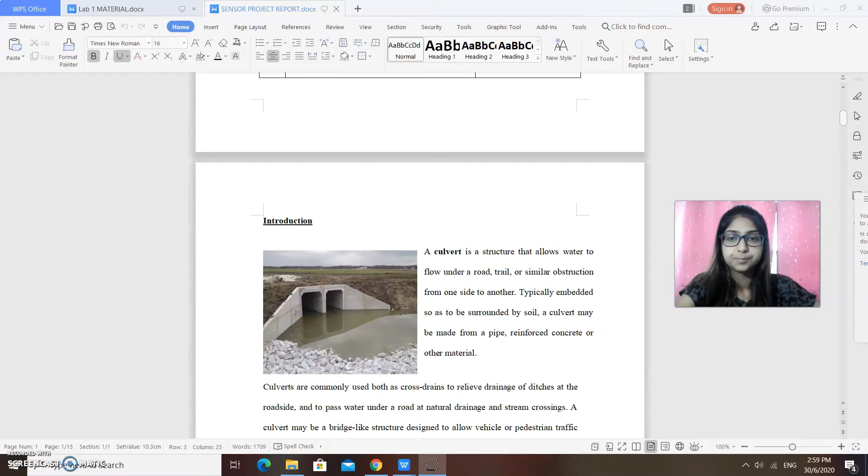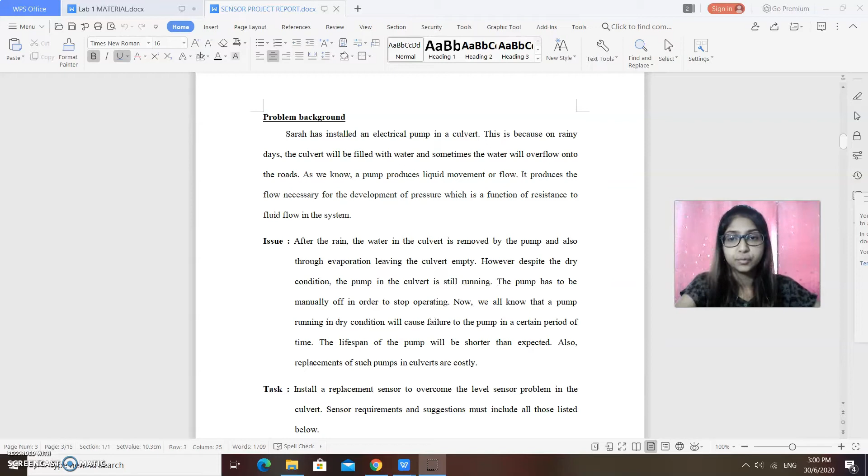The problem background. Sarah has installed an electrical pump in the culvert. This is because on rainy days the culvert will be filled with water and sometimes the water will overflow onto the roads. As we know, a pump produces liquid movement or flow. It produces the flow necessary for the development of pressure, which is a function of resistance to fluid flow in the system.

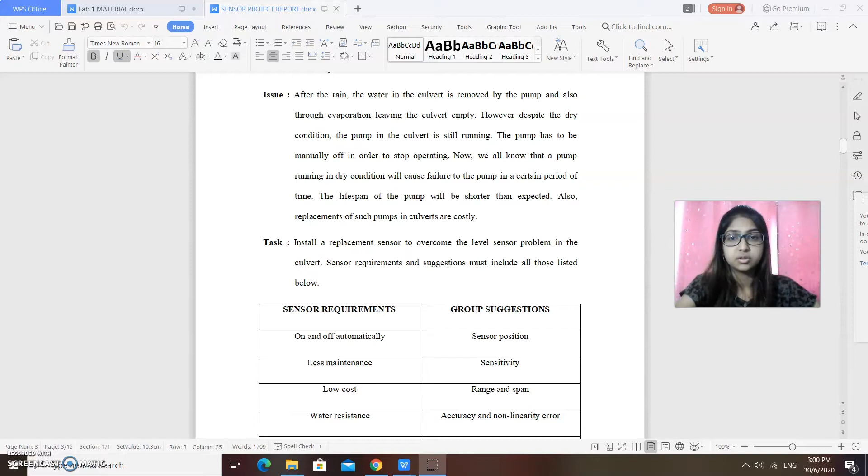The issue is, after the rain, the water in the culvert is removed by the pump, also through evaporation, leaving the culvert empty. However, despite the dry condition, the pump in the culvert is still running. The pump has to be manually turned off in order to stop operating. The lifespan of the pump will be shorter than expected. This is because a pump running in dry condition will cause failure to the pump in a certain period of time. Also, replacement of such pumps in culverts is costly.

Our task is to install a replacement sensor to overcome the level sensor problem in the culvert. Sensor requirements and suggestions include on and off automatically, less maintenance, low cost, water resistance, and suitable for outdoors. Our group suggestion includes sensor position, sensitivity, range and span, accuracy and non-linearity error, and also resolution if any.

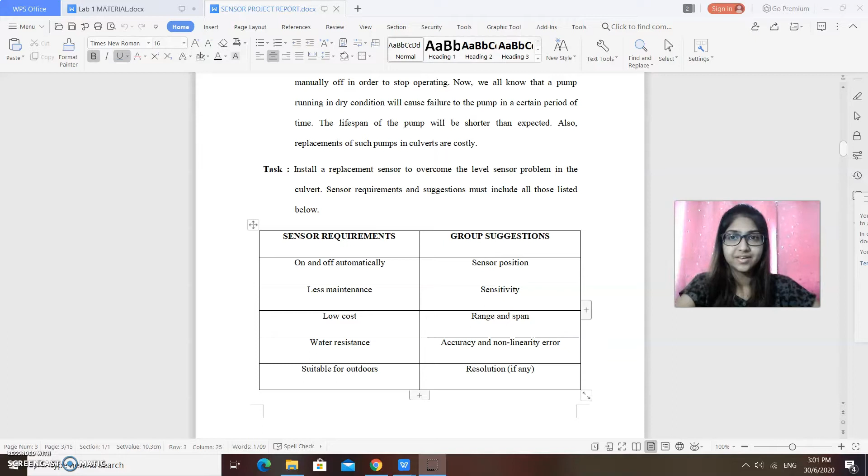I am now presenting predictive maintenance of magnetic level sensor for culvert system. Predictive maintenance is a process which alerts a maintenance technician to a problem that develops in a critical production system. This strategy offers cost savings over regular or time-based preventive maintenance, since activities will only be undertaken if necessary.

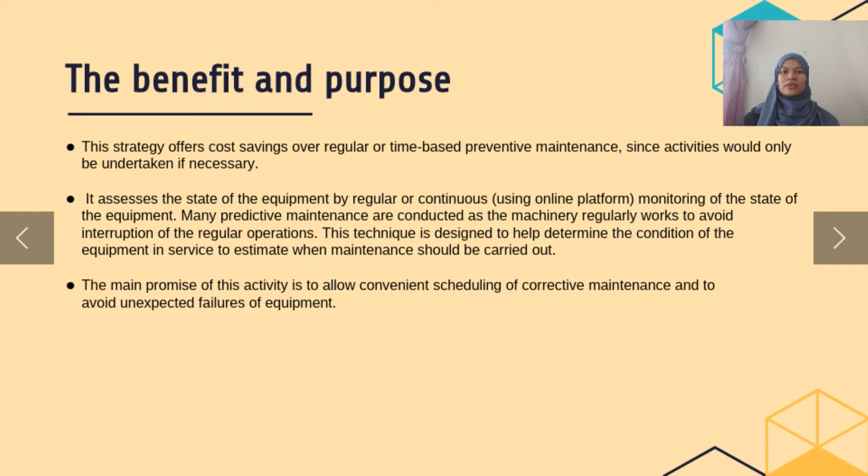It assesses the state of the equipment by regular or continuous online monitoring of the state of the equipment. Many predictive maintenance activities are conducted as the machinery regularly works to avoid interruption of the regular operations. This technique is designed to help determine the condition of the equipment in service to estimate when maintenance should be carried out. The main promise of this activity is to allow convenient scheduling of corrective maintenance and to avoid unexpected failures of the equipment.

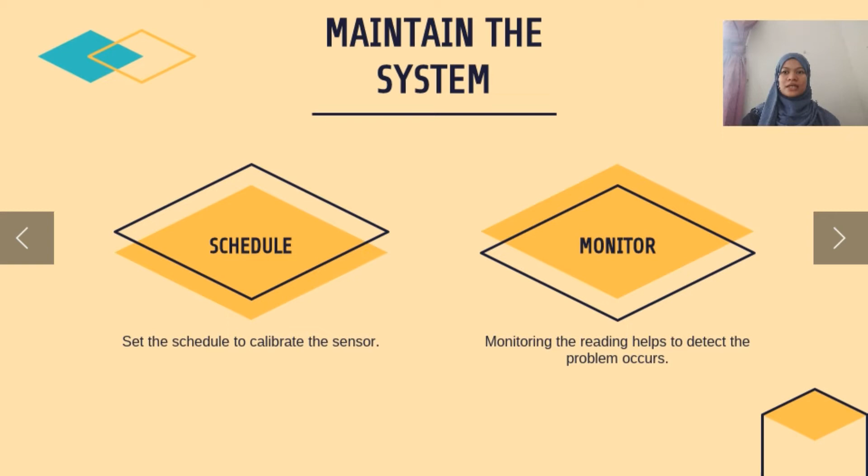In order to maintain the system, we must set the schedule to calibrate the sensor. The monitoring of the reading helps to detect problems early. Mounting and preventive maintenance are the recommended installation method for level gauge. Before installation of the level gauge, the mounting methods must be done correctly.

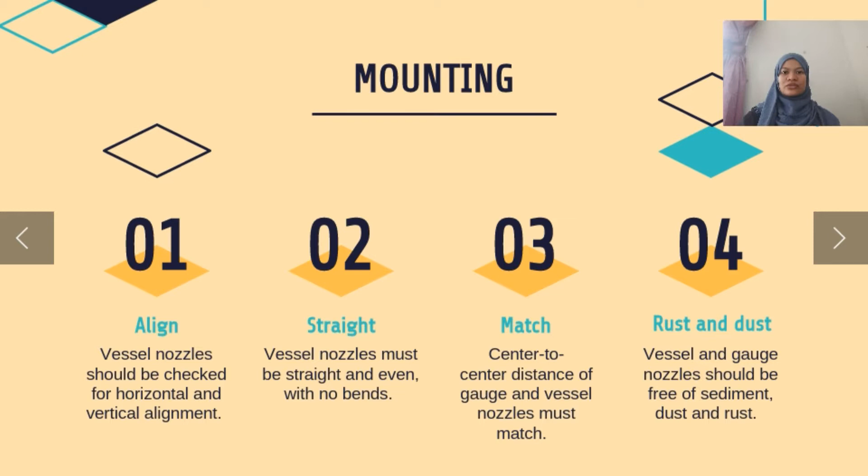Firstly, vessel nozzles should be checked for horizontal and vertical alignment. Secondly, vessel nozzles must be straight and even with no bends. Thirdly, center to center distance of gauge and vessel nozzles must match. And lastly, vessel and gauge nozzles should be free of sediment, dust, and rust. Periodic inspection will keep the level gauge operating properly for many years. This gauge provides level indication on critical services, and a systematic program of preventative maintenance will provide excellent long-term protection.

We must first keep the inside and outside of the level gauge clean. If there are any impurities in the process, or if it tends to build up on equipment, it will be necessary to flush the gauge periodically. How often or thoroughly will depend on the nature of the process liquid. It is important that the float can move freely inside the chamber. If there is an externally mounted transmitter or alarm switch, it is important that all covers and seals are in place and maintained. Moisture, dust, and debris entering these electronics housings can cause permanent damage, leading to failure.

Monthly inspection for float, terminals and connections should be done. Take the float out of the chamber once a month to test for leakage or damage. Replace and reinstall the float. Proper float is critical to level gauge operation. Lastly, check the electrical terminal connections and wiring for signs of damage due to heat or vibration.

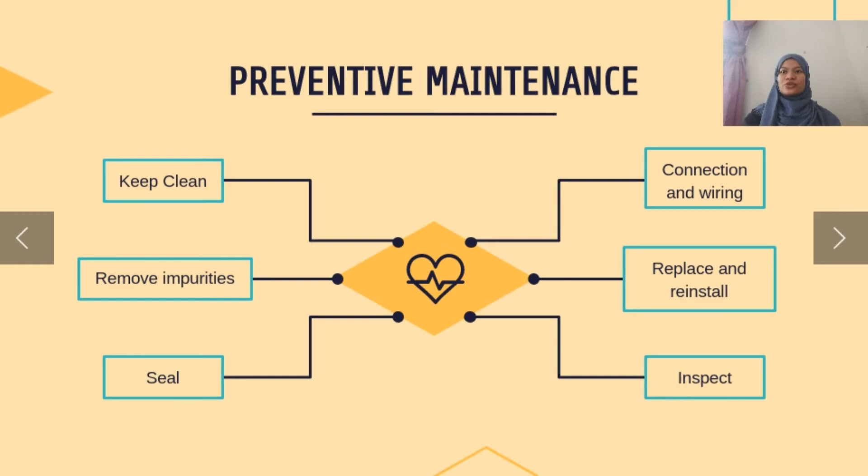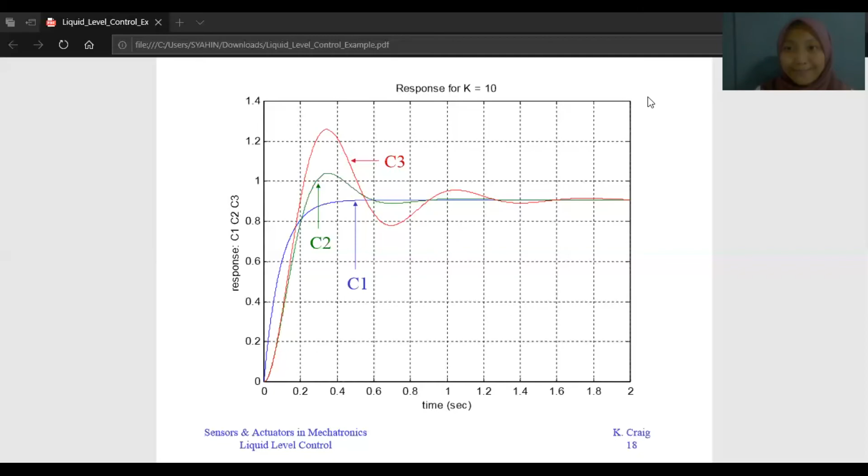First, we need to know what stability is. A system is said to be stable if its output is under control. A stable system produces bounded output for a given bounded input. If the input is bounded but the output is unbounded, the system is unstable. In addition, if the input is unbounded, we will see an unbounded total response, and we cannot draw any conclusion about the stability of the system. Physically, an unstable system whose natural response grows without bound can cause damage to the system.

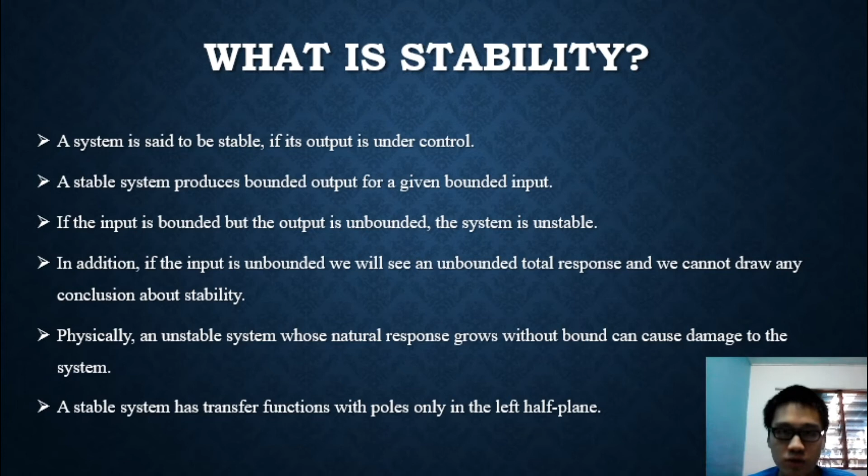A stable system has transfer functions with poles only in the left half plane. Next, types of systems based on stability. There are three types. The first is absolutely stable system: the system is stable for all ranges of system component values. If all the poles of the transfer function are present in the left half plane, the system is said to be absolutely stable. Next, conditionally stable system: the system is stable for a certain range of system component values.

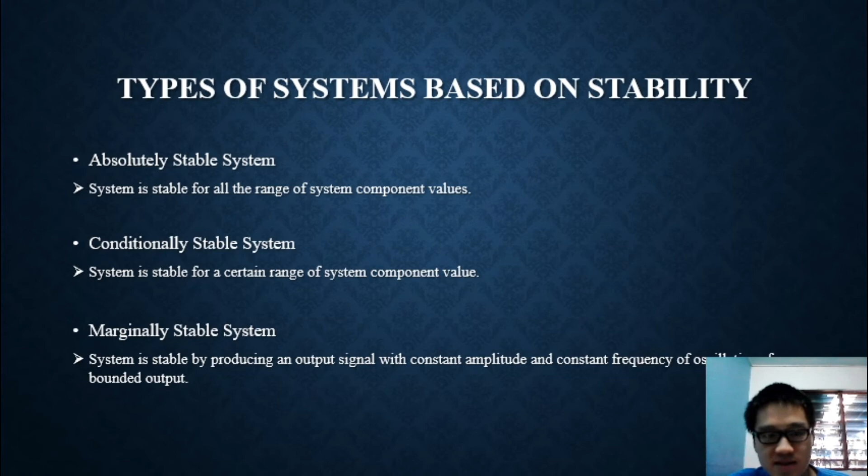And the last one, marginally stable system: the system is stable by producing an output signal with constant amplitude and constant frequency of oscillation for bounded output. If any two poles of the transfer function are present on the imaginary axis, the system is said to be marginally stable. So we need to know how to ensure stability of the system.

Addition of poles to the transfer function has the effect of pulling the root locus to the right, making the system less stable. Addition of zeros to the transfer function has the effect of pulling the root locus to the left, making the system more stable.

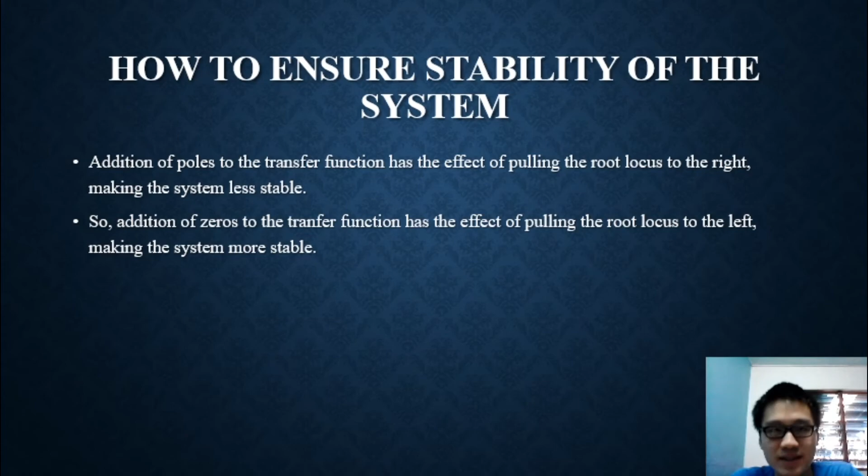Thank you. Okay, now the part I'm going to explain is details. Let's see the specifications first: the specification of the magnetic float level switch sensor.

The life expectancy of the sensor is a minimum of 1 times 10 to the power of 6. Allowable impact is a maximum of 100 meters per second squared. Insulation resistance is more than 100 mega ohm at 500 VDC for metallic sensor only. Withstand voltage is 15,000 V AC for 1 minute, again for metallic sensor only.

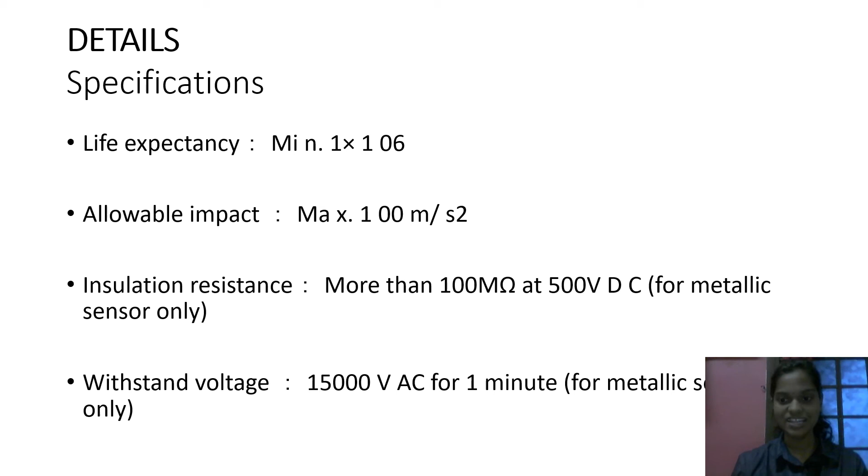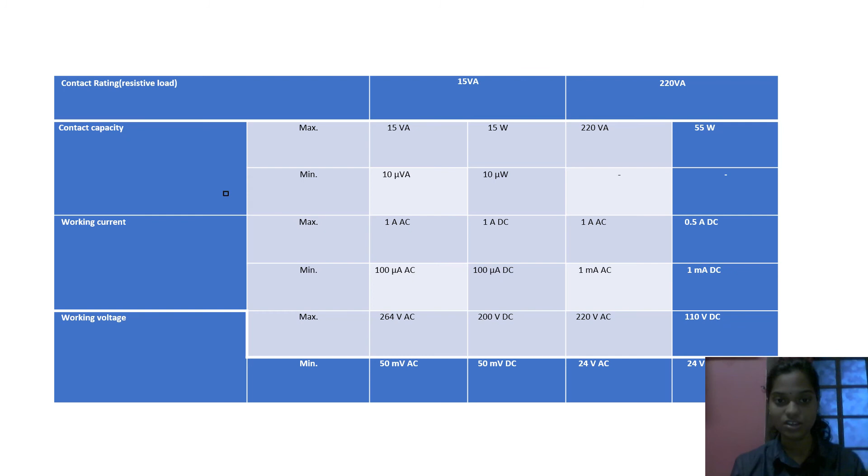So I'm moving on to the next slide. Here I have included the contact capacity, working current, and working voltage of the sensor in a table form.

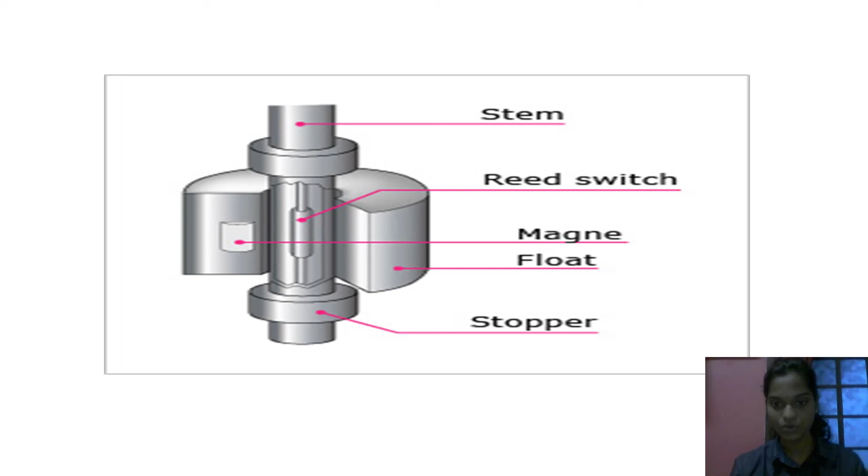Here I have included a picture of the magnetic float level switch. There is a stem here, reed switch, magnet, float, and stopper here. So next slide is the working principle.

To explain it very shortly, I have included this here. The float rides on the process liquid surface, precisely tracking liquid surface motion. Rising liquid level lifts the float, sliding the attraction sleeve up inside the enclosing tube and into the magnetic field to actuate the electrical or pneumatic switch. This signals the presence of liquid.

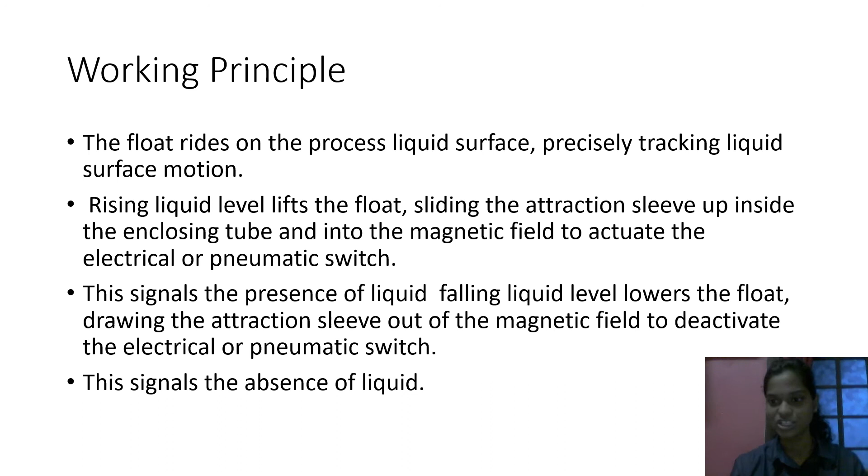Falling liquid level lowers the float, drawing the attraction sleeve out of the magnetic field to deactivate the electrical or pneumatic switch. This signals the absence of liquid. So this explains it very shortly. I have included the full thing in the report.

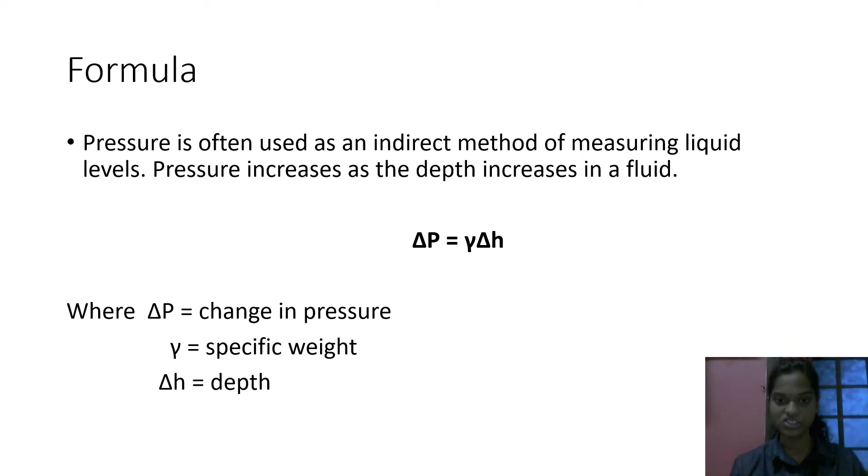When it comes to the formula, pressure is often used as an indirect method of measuring liquid levels. As we know, pressure increases as the depth increases in the fluid. We can see in the formula itself, change in pressure is equal to specific weight times depth.

Next slide: the buoyancy B, or upward force on a body in a liquid, can be calculated from the equation. What equation is that? Buoyancy is equal to specific weight times area times the depth.